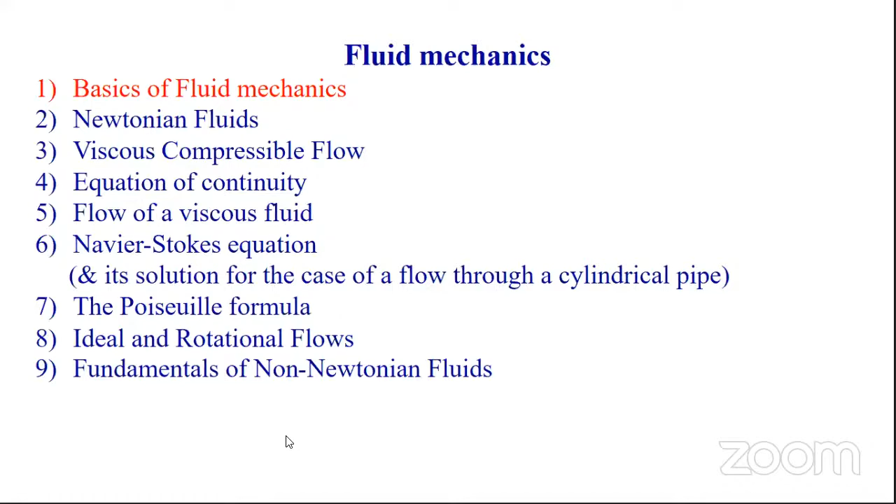Then the fundamentals of non-Newtonian fluids can be covered, not an issue. If you are well aware of these terminologies and concepts of fluid, then it becomes easier for me to go through in a relatively good manner, rather than keeping very slow like I've been doing for the last 4 or 5 classes.

Good. Here, one condition will come. I take it for granted that whatever examples I'm giving, you are well aware of them. If the concept excites you, then I'm thankful to nature, because the main purpose of a scientist, an academician, or science in general—whether at school, college, or university level—is to understand the phenomena and processes happening in nature: why they occur, how they occur, at what time, and what must be the reason behind it. We want to know the reason, and those reasons can be utilized for the betterment of mankind.

For the betterment of mankind, we think there is one condition in fluid mechanics called the no-slip condition. You should not slip.

While walking on a road, when it is muddy or slippery, sometimes you might lose balance and slip, even though you've been practicing walking for more than 21 years—right now you're in the fourth semester, around 22 to 23 years old, not less than 22, maybe excluding a year or two as a kid at birth. But with about 20 years of experience in walking, you will still slip at some places. Most older people will slip and cannot balance their body.

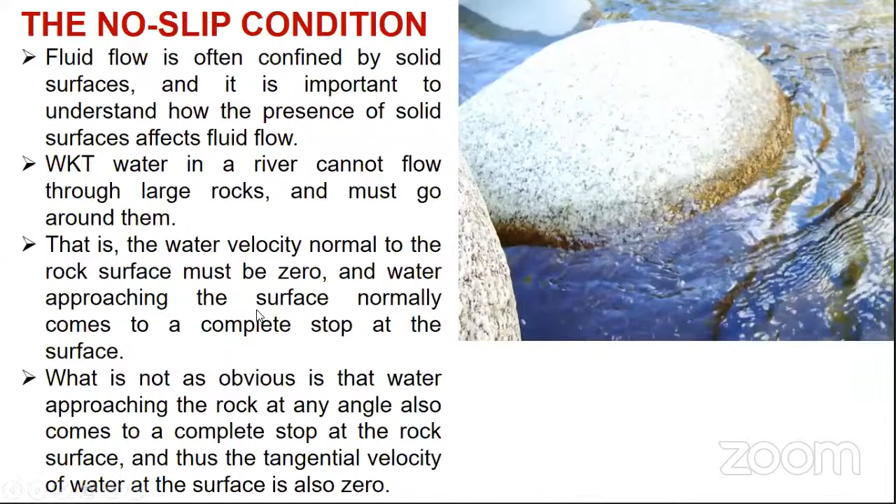It will stop, it will not move at all, it will stick to the rock surface. And thus the tangential velocity of water at this surface is also zero, except the water which is leaving at the opposite point. This condition is known as the no slip condition, meaning water is not slipping through the rock, because it holds, except where slippery growths like algae and fungi form. This is one of the most beautiful properties of any fluid.

Therefore, consider the flow of a fluid in a stationary pipe or over a solid surface that is non-porous, meaning impermeable to the fluid. For example, take a container, keep the fluid within it, and take a plate that is permeable, where fluid can flow from one point to another. Put that layer in between the liquid; in terms of concentration, it has to move from higher concentration to lower concentration depending on the permeability.

If you dip grapes into water, the grapes will swell. Water will enter into the grape, even through such a solid surface, depending on the permeability, even starch and some solutions like that. But if you dip them into a sugar solution instead of water, because the concentration of sugar may be more than the concentration of the grapes, instead of growing they may be shrinking. That you have to think of. Here, the surface is impermeable to the fluid.

All experimental observations indicate that a fluid in motion comes to a complete stop at the surface and assumes a zero velocity relative to the surface. That is to say, for all solid objects or obstacles, a fluid in motion comes to complete rest at the surface and assumes zero velocity relative to the surface of that object. That is, a fluid in direct contact with a solid sticks to the surface. I hope you got it.

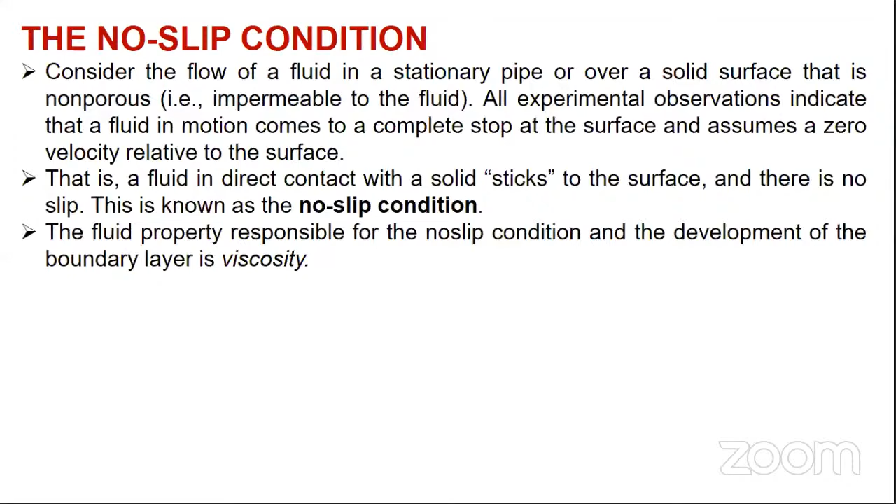As a consequence of the no slip condition, the velocity profile must have zero value with respect to the surface at the point of contact between a fluid and a solid surface. Wherever a fluid comes in contact with the solid surface, the velocity of the fluid should be zero. As it moves away from the surface, the speed will pick up with reference to the solid surface. Therefore, the no slip condition is responsible for the development of the velocity profile.

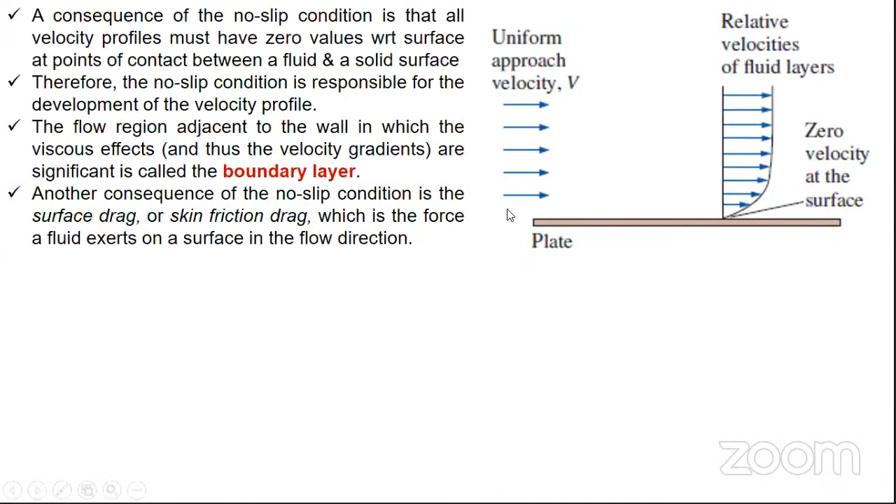Okay, separation point. A phenomenon similar to the no slip condition occurs in heat transfer also. Don't always go only with fluid mechanics. The transport of heat energy from one point to another point is also a phenomenon similar to the no slip condition. How? When two bodies are at two different temperatures, you can bring them in contact.

What happens? Heat transfer occurs such that both bodies have to assume the same temperature at the points of contact. The body at higher temperature will transfer energy to the body at lower temperature, or the body at lower temperature will receive energy from the higher temperature, and both will attain the same temperature. That is the equilibrium temperature. They have to attain temperature equilibrium. Therefore, a fluid and a solid surface.

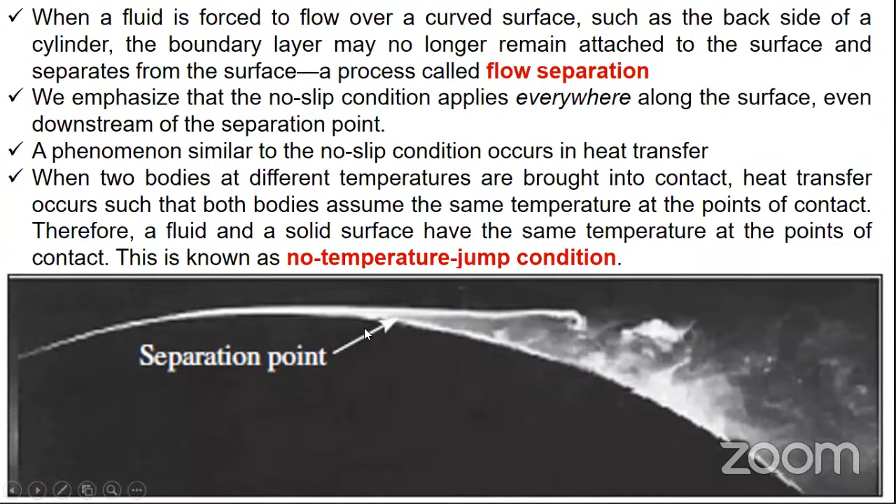This phenomenon, where fluids moving through curved surfaces will not be in contact with the surface at some point, mainly because they move straight depending on the force, they call it flow separation. Based on this, we can classify the fluids, because later we will proceed only in terms of these terminologies.

We defined earlier fluid mechanics as the science that deals with the behavior of fluids. What kind of behavior? Like the temperature, density, momentum, volume, change in volume, or pressure. They are the properties. Those properties and behaviors will change, including the shape, either at rest or in motion. Even if you take water in a cup and study the properties with reference to time, how the property will change.

For example, if the water has an energy of about 60 degrees Celsius, and you allow time, how the temperature decreases and adjusts with its environment. Or if you allow the same fluid to move in a certain way, like water moving in a canal, or in a pipeline, and the interaction of fluids with solids or other fluids at the boundaries, how it has to

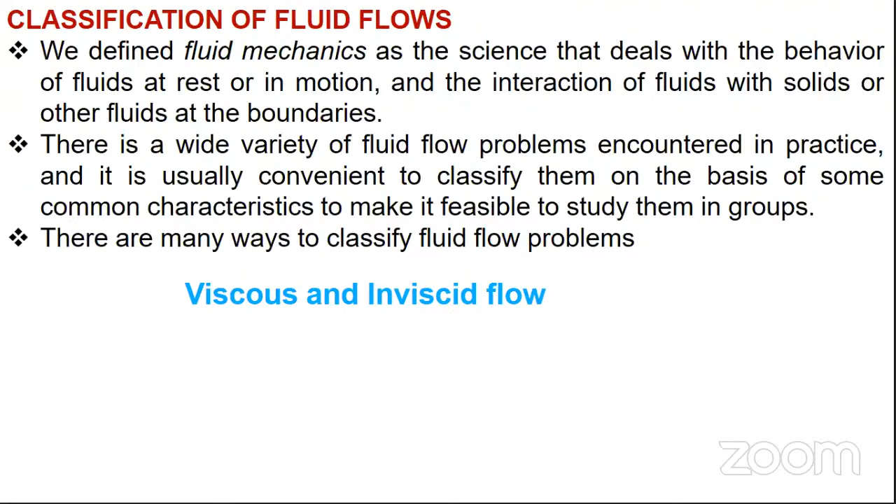When two fluid layers move relative to each other, a friction force develops between them, and the slower layer tries to slow down the faster layer. Simple relation. Assume the fluid is moving from one point to another, with two layers: the top layer is moving faster, and the bottom layer is moving with a relatively slower speed. The top layer tries to pull the bottom layer along the direction, but the bottom layer tries to pull the top layer to slow down its speed. Because of the high speed, the top layer tries to drag the material along the direction.

For example, if you throw some floating material into a canal, the floating material will flow along with the water, because the water drags it. But if you leave a relatively heavier mass, a tough material, there, the flow of water will be dragged by that substance. Here it is the same case, but we have taken two fluid layers moving relative to each other; a friction force develops between them, and the lower layer always tries to slow down the faster layer, bringing the speed of the top layer down.

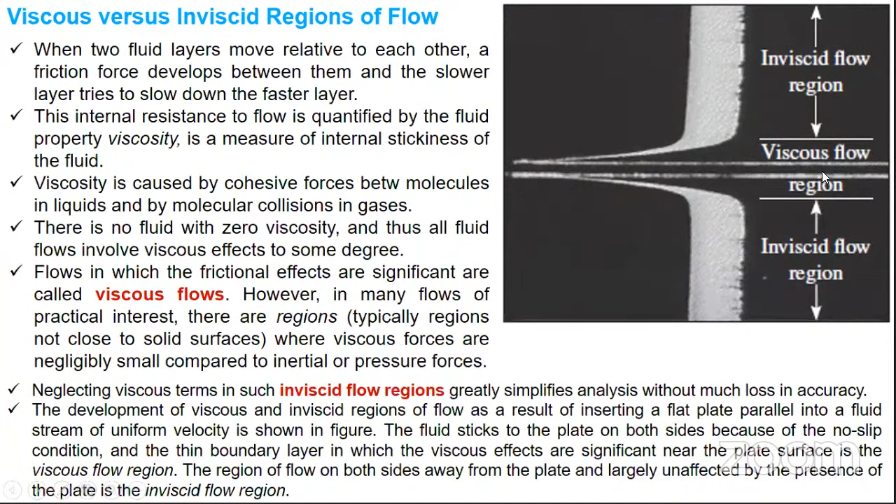The region of the flow on both sides away from the plate, largely unaffected by the presence of the plate, is the inviscid flow. This top layer from here is inviscid flow. Okay, the regions between, marked as the viscous flow regions, are influenced by the plate. Because of that, we can also classify fluid flow into internal flow and external flow. Some examples we can go through. Of course, it is a beautiful way of explaining the fluid properties.

A fluid flow can also be classified as being internal or external, depending on whether the fluid flows in a confined space or over a surface. Okay, the flow of an unbounded fluid over a surface such as a plate, a wire or a pipe is an external flow. Unbounded flow means if you allow the water to flow through a canal, it is an unbounded flow. Even on the surface of a plate, or if you allow a drop of water to flow on a wire, it flows freely, or even over a pipe, it is known as an external flow. The flow in a pipe or within a duct is internal flow.

If a fluid is bounded by the solid surface, meaning it is covered entirely and has to take the shape of the container, then only can we say that it is an internal flow.

Water flow in a pipe is internal flow, there is no doubt. Air flow over a ball, for example, air is moving through the ball, or instead the ball is moving and the air is not. If you throw the ball, it has to forcibly move within the air, almost like swimming.

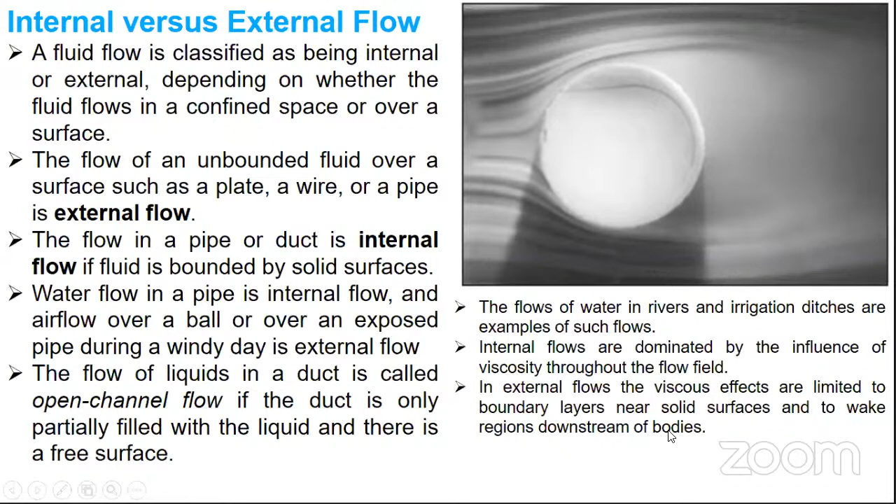Internal flows are dominated by the influence of viscosity throughout the flow field. In external flows, the viscous effects are limited, particularly to the boundary layers near the solid surface and to wake regions downstream of bodies.

We can also classify flows as compressible and incompressible. Compressibility means how can we compress the fluid. If you take atta, like wheat or maize flour, and press it, you can put more and more into the same volume by compression.

Let us imagine a 1 liter bottle filled with 1 liter of water, and try to press it. You can't put in 1010 ml, you can't even add 10 ml extra to that water bottle. If it is exactly filled with 1 liter, wherever you go that should remain 1 liter, though of course it is also a function of temperature and atmospheric pressure.

A flow is classified as being compressible or incompressible, depending on the level of variation of density during the flow. Incompressibility is an approximation in which the flow is said to be incompressible if the density remains nearly constant throughout.

If the density changes, for example by pressurizing or compressing, the density has to go up. If the density goes up, those fluids are called compressible fluids. Density remains constant for liquids. Therefore, the volume of every portion of a fluid in movement remains unchanged over the course of its motion when the flow is approximated as incompressible.

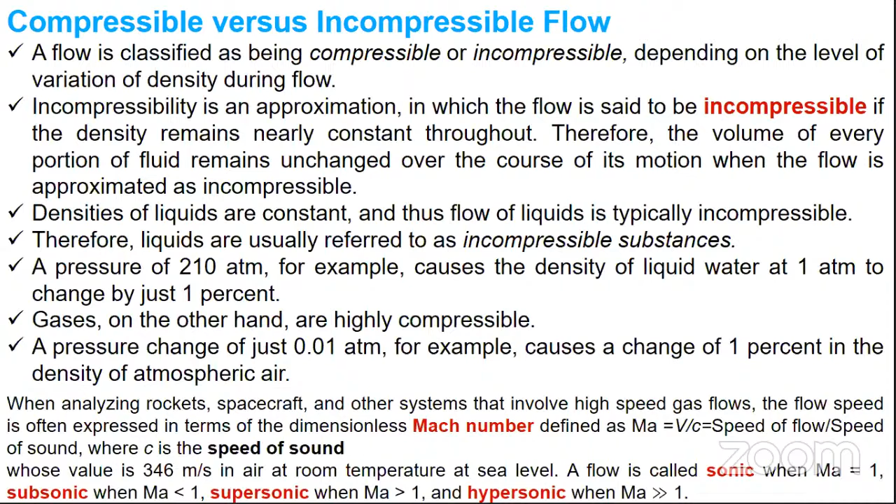They compare the speed of the flow of the fluid with the speed of sound. If it is less than the speed of sound, it is subsonic. If it is equal, it is sonic. If it is greater, it is called supersonic. If it is still much greater, it is called hypersonic.

Thereby we get two kinds of flows: laminar flow versus turbulent flow. What do you mean by laminar flow? Laminar means the fluid moves in the same line, following the same path as the fluid ahead of it.

Some flows are smooth and orderly, while others are rather chaotic. Some flows are very smooth and move in a perfect direction—all such flows should be laminar. For example, in pens used for writing, whether gel, non-gel, or solid ink, the ink in the refill has to move very smoothly. That is why the flow should be laminar, linear, and not turbulent—unlike water during boiling, which moves chaotically in different directions.

It is also not chaotic. Highly ordered fluid motions characterized by smooth layers of fluid are called laminar flow. The word laminar comes directly from the movement of adjacent fluid particles together, which are called laminae. The flow of high viscosity fluids such as oils, which have more viscosity, is typically laminar at low velocities.

If you increase the speed, the flow becomes turbulent. The highly disordered motion of the fluid typically occurs at high velocities and is characterized by velocity fluctuations—changes in the speed of the fluid along the direction of flow. That's why we call it turbulent flow. The atmosphere is turbulent.

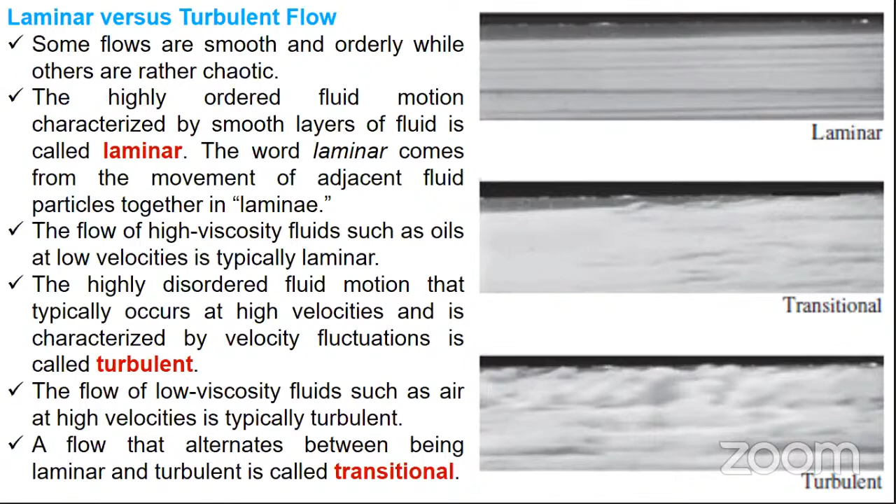The bottom layer is highly turbulent. You can see the shape of clouds of that kind. Such things can be observed preferably in gases rather than liquids to a great extent - and here is the transitional. Even in liquids, if you allow water to flow in a canal and there are huge rocks, the water will not move in a laminar linear way, it will get turbulent, including swirling.

There is also a classification, maybe in the last slide - natural versus forced flow. The natural one is called unforced flow, the other is called the forced flow. A fluid flow is said to be natural or forced depending on how the fluid motion is initiated. In forced flow, a fluid is forced to flow over a surface or in a pipe.

You can expect that kind of thing. In natural flows, fluid motion is due to natural means such as buoyancy force or buoyancy effect, which manifests itself as the rise of warmer or lighter fluid. Warm air rises up, cold air sinks down. Cold air becomes denser and sinks down - sinking need not be downward. Warm air, because it is lighter, has to move up.

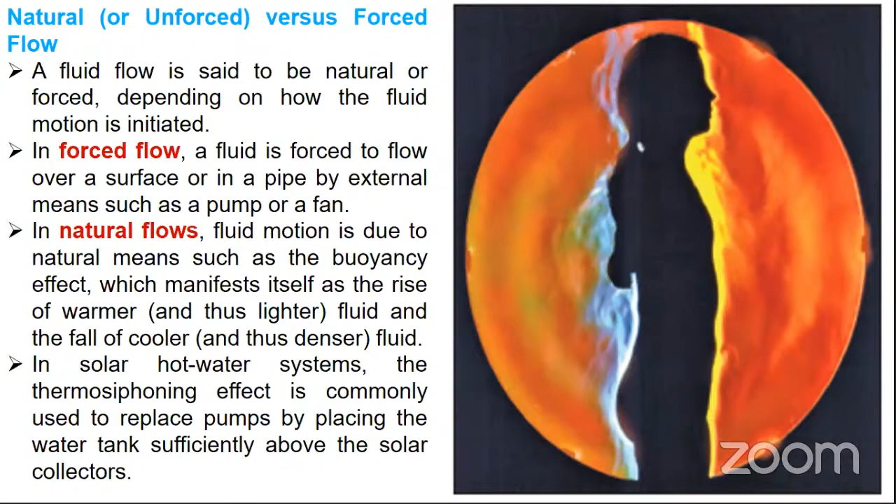Steady and uniform may be put together. Unsteady and disturbed or chaotic can be put together. The term steady implies there is no change of properties. Steady flow means no change of the properties, in the sense no change in the velocity, no change in the temperature, no change in the direction.

Of course, direction may change. Of course, no change in the speed of the movement of a fluid at a point with respect to time. The opposite to steady, you can call unsteady.

The term uniform implies no change. Uniform means no change. If there are changes with location over a specified region, it is called non-uniform. These meanings are consistent with their everyday use, there is no doubt.

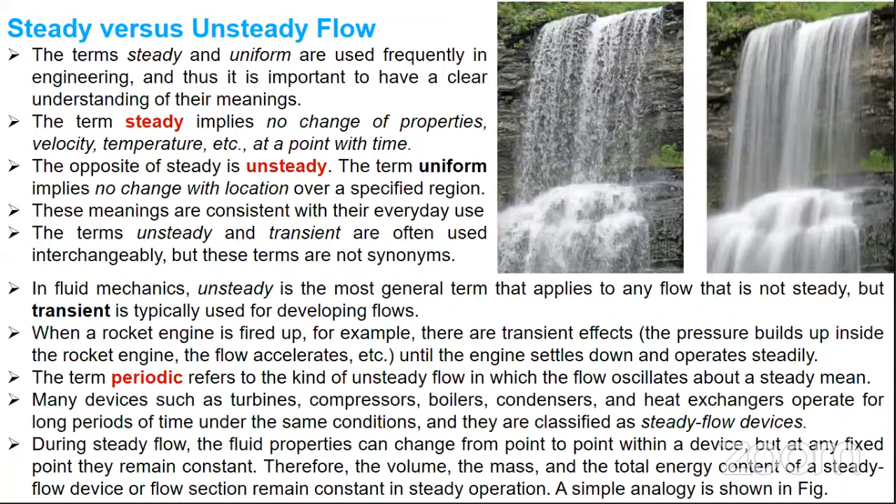Next class we will go ahead with some more important features of fluids. We'll take it up in the next class.